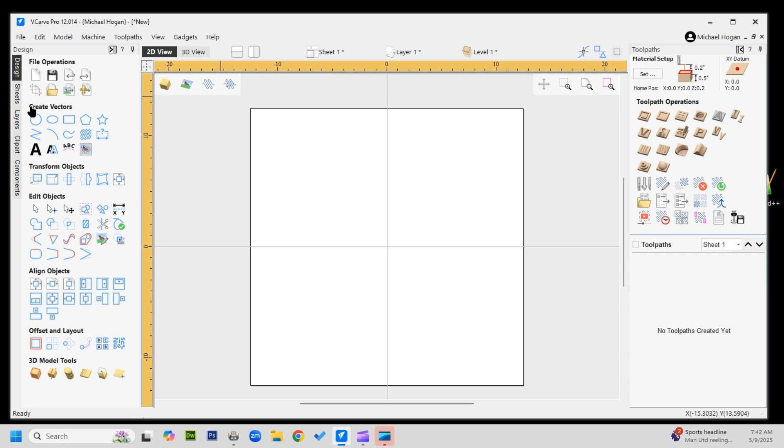And zero position, I like to use the material surface. You can use the machine bed if you prefer that. The gadget prefers the XY datum being in the center, and then we say OK to that, and it sets our project. Now we'll go change this to layers so you can see the layers coming in along with the gadget when the gadget creates the miter fold box layout. Here is our interface.

You have the box width, which is on the x-axis, and this is all set up in my perspective. And then the y is the length for the vertical. And then you have your side heights. I'll show you that in a few minutes, how that's created. And then you got your material thickness. That should be the same as your job setup.

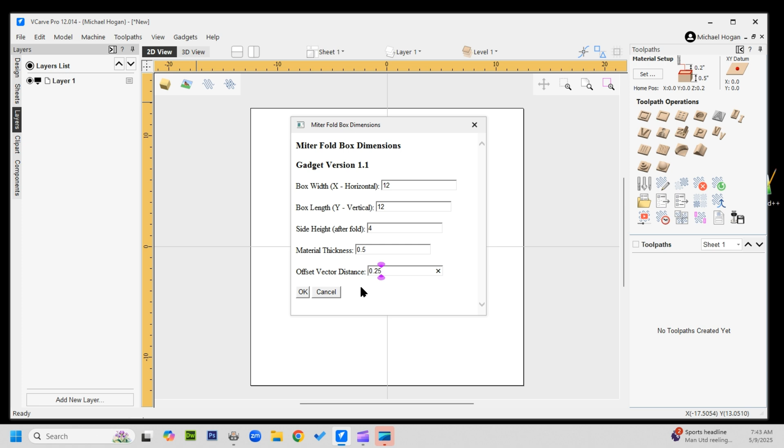And this is the offset vector distance and the gaps between each one of the created vectors. There's a set of 5, sometimes 6, of your offsets; it depends on the thickness of the material. We're going to change this one to 0.25 for the 1/2 inch material thickness. And it repeats everything that you put in and shows the feedback. You got a 12-inch by 12-inch with 4-inch sides.

The 4-inch sides is measured from this center vector of each one of these clusters of vectors. The center vector is your locating vector for the width, length, and the side. The side is combined, measuring from the center here to this outside perimeter boundary cut. That's your 4-inch sides. These 4 corners are scrap. Your sides are 1, 2, 3, 4 sides here.

Then you have your material thickness being repeated, and the offset width of each one of these vectors is 0.25, and there's a maximum of 2 offsets. In fact, I need to remove an S. Anyway, what this is telling you here is that you have 2 offsets from the center vector. The first set of offsets on either side of the center line vector is offset 1 in your layers. And then offset 2 is the one that's the furthest out from the center vector. And then you have your profile cutout vector. I will show you these right now.

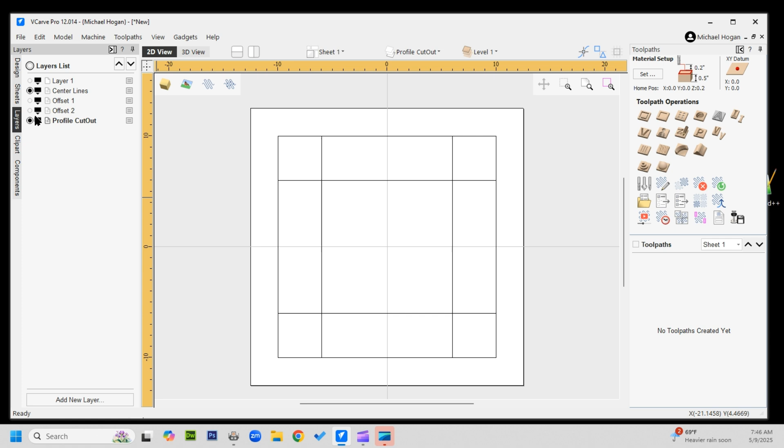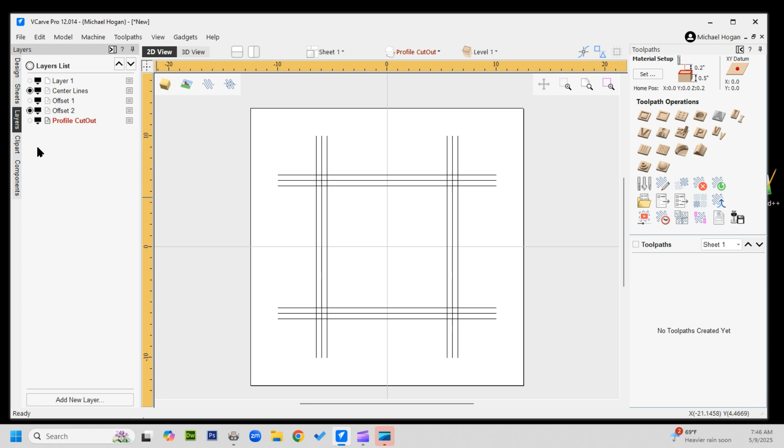Okay, you got your center vector, that's your locating vector that gives the bottom of the box 12 by 12. The sides is measured from here to the outside boundary cut, which I just put up. Now we'll take the boundary cut out and we'll show you the first offset. I'll click it off and on a couple times and you can see it. Now we'll go to the second offset of those vectors. This is what's used to put the V bit on to carve the miter. And I'll show you that after I click all those back on.

And the gadget does not have the tool pathing. There's too many variables involved, and you need to fine tune the tool pathing in order to get a nice smooth miter for each one of these cluster groups of vectors. So the best thing to do is to create your tool paths one at a time, and then you save the tool paths as a template for that particular material thickness.

And another note here, that toolpath template for that particular thickness can be used for any size box that you create for that thickness. So in other words, you don't have to create another set of tool paths for a different size box. If the material thickness is a 1/2 inch, you continue to use that toolpath template. So let's bring in my toolpath template and you'll see what I'm talking about.

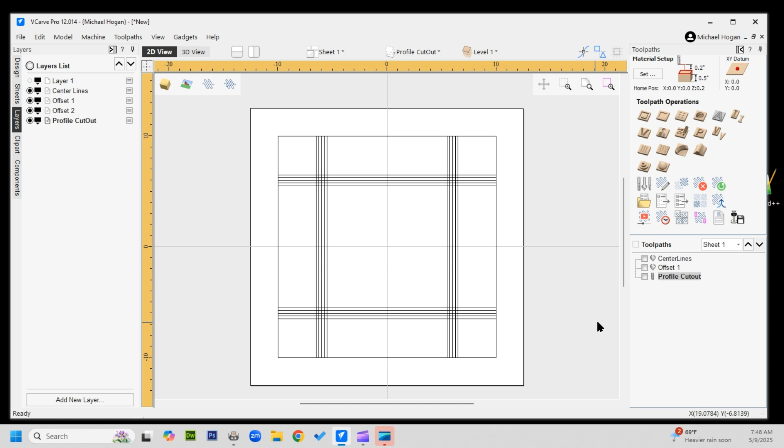I identified it as a 1/2 inch with a 0.25 offset. We'll go ahead and load that. And then the next thing you want to do after you've loaded it, you go calculate it. Now we'll play the preview. And of course, I'm noticing that it's only using one offset. It didn't need the second offset. When I created it, that's what I found out, that I didn't need my second offset.

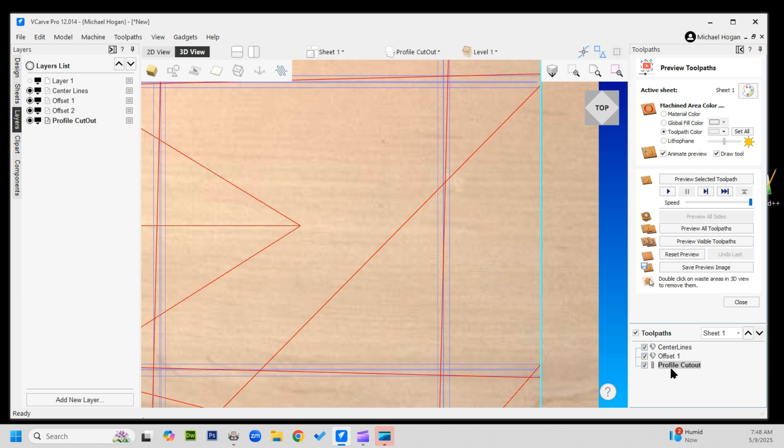So I only created the two tool paths. Well, actually, it's three. One is for the center lines, and then the offset from the center line, and then the profile cutout. Let's play that and you'll see what it does. That's kind of fast.

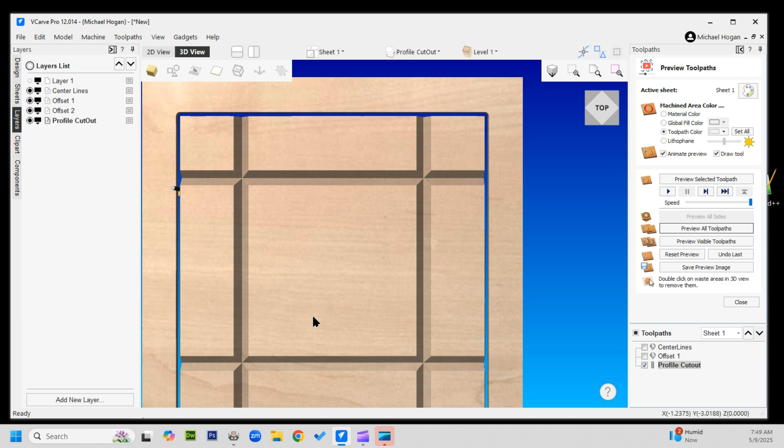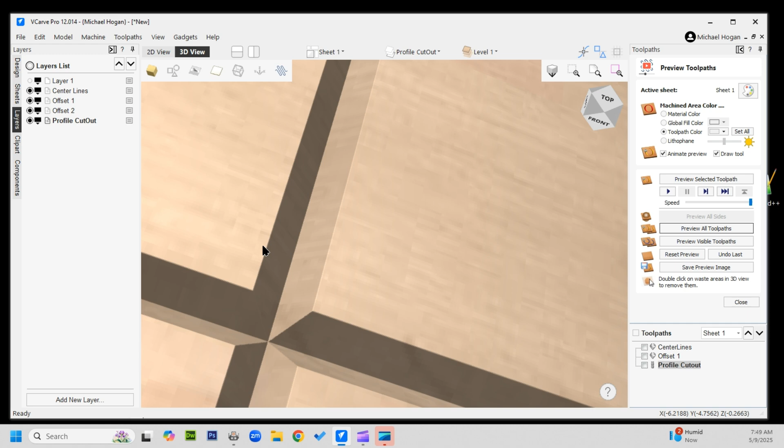I got too many passes on that, but that's okay. That can be fixed. So there you see the miter fold box. These four corners are scrap. You got your four sides and you got your bottom. And the miters are nice and clean. There you have it, folks.

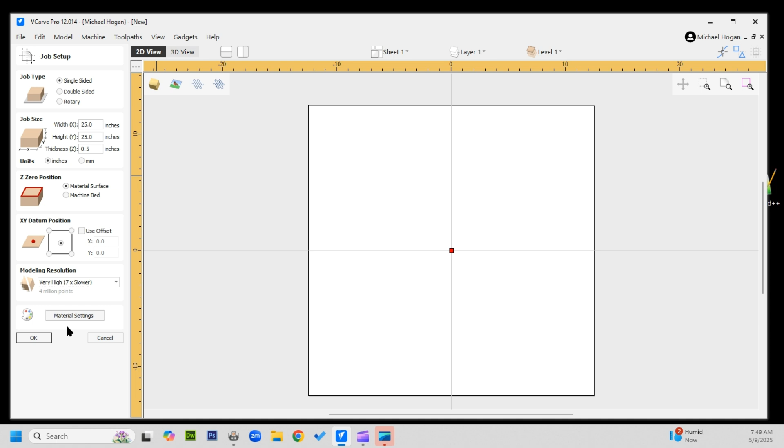A miter. In fact, let's do it again, only I'm going to change this box size so that you can see it's an uneven box. So let's go close everything here, recreate from the start, project all the same, and then we go get the gadget,

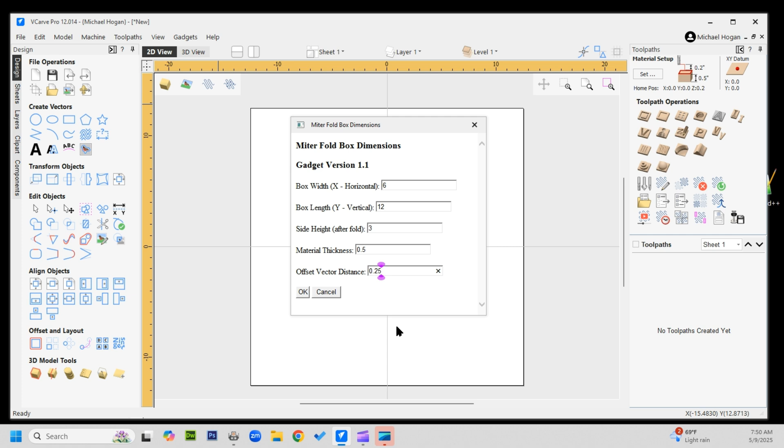and I'm going to make it a 6-inch width on the x-axis, make the narrow or the long end on the y-axis. And the miter fold you see here, this is after the fold, it's 4 inches. 6 by 12, let's change it to 3 inches, and then you can see that it does actually create the vectors accordingly.

And there's our report showing everything, and it's showing two offsets, which we may not have to use those two offsets, but we're ½ inch thickness. So we'll see when we bring in the toolpath template. And there you see all the layers that were created, your default layer along with the others. And there it's created the box in an unequal size. And it's got 3-inch sides instead of a 4-inch side. 6 by 12 by 3.

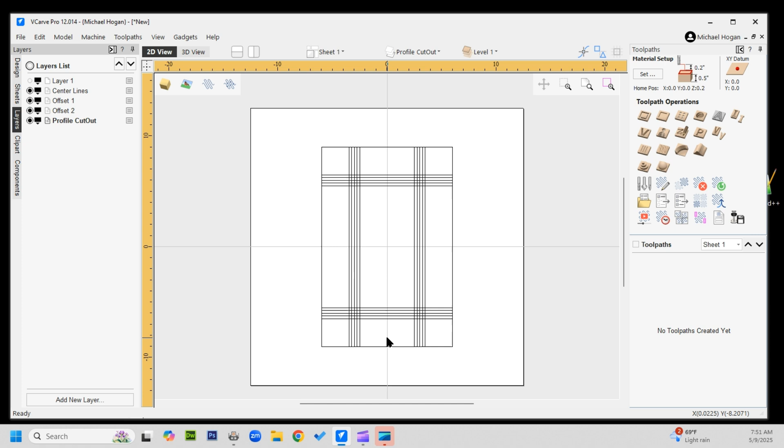And we can verify that by going to the design and clicking on here. And we measure from the center outward 3 inches, which shows right here 3 inches. And then we go the other direction, it says 3 inches also. And then we can measure, we close that and do it again.

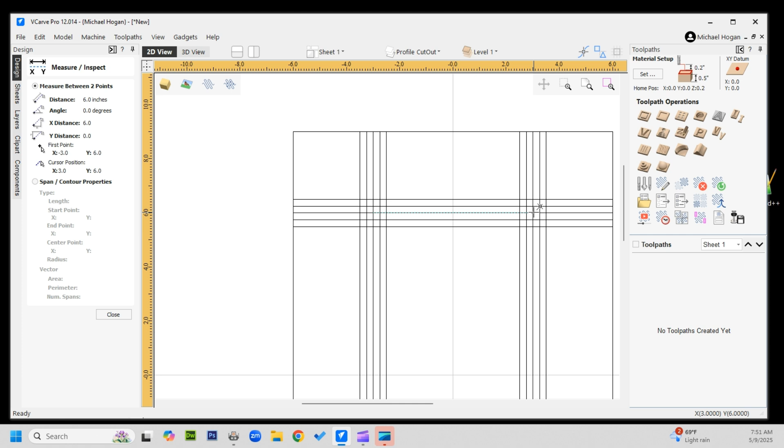And we'll measure from, well, actually, I could have gone from here to here. And you notice it says 6 inches wide. And we go the other direction to the center. It's 12 inches long. So the box is created properly. Now what we'll do is close this.

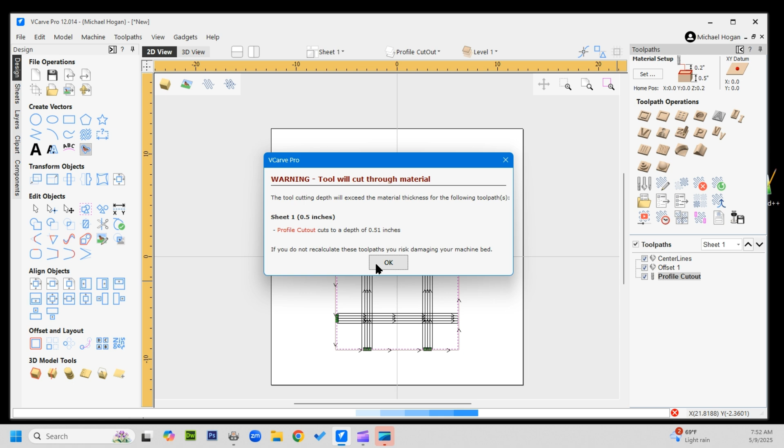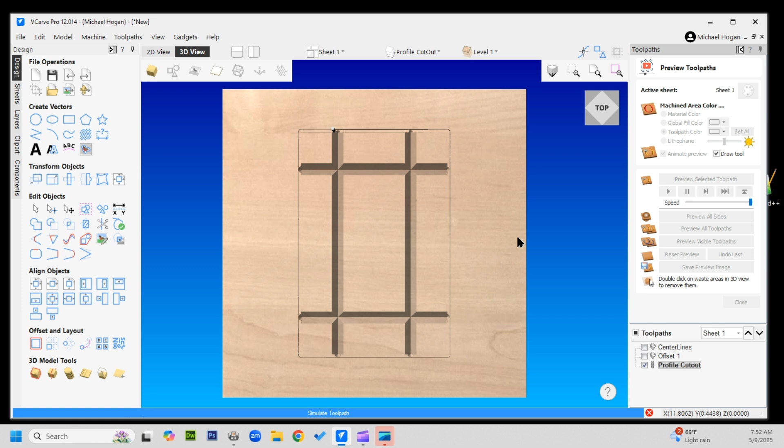We'll bring in the toolpath template, which is a 1/2-inch tool template. And then we'll calculate. And now we'll preview that and see what we have. It looks like the miters are nice and smooth, and you only needed the one offset. So bravo, it worked fine.

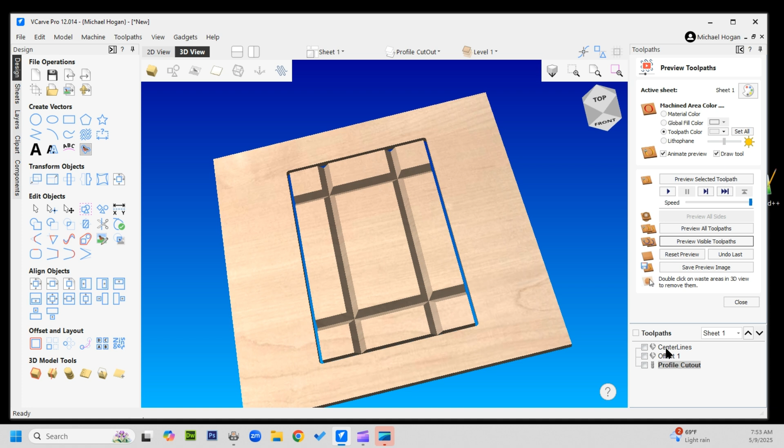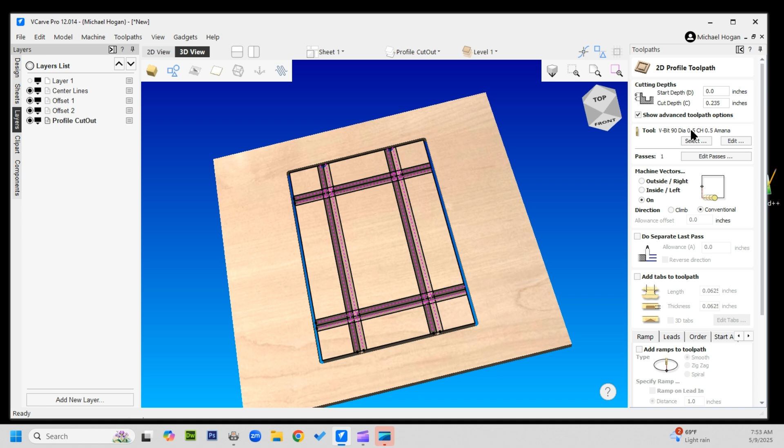The Gadget creates a few more offsets, and the reason for that is because the tooling involved does play a factor in the layout of the miter. Right here, I'm using a 1/2-inch cutting height. If you use a smaller cutting height, you're going to have to maybe use one of those, more of those offsets. In this particular case, I only needed to use the one after the center line was cut.

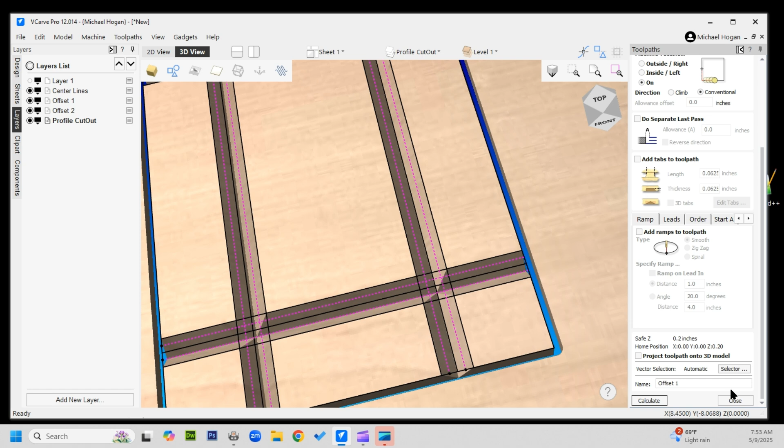It just goes up, cuts the center line, moves out a bit, and then the depth doesn't go down nearly as far. In fact, let me close this and we can take a look at the depth. See, the depth there is about half of the thickness. And one other thing I want to mention that I did with this also is the miter fold. Hello. Okay, won't get rid of my material till I get that back. Now I can get rid of the outside.

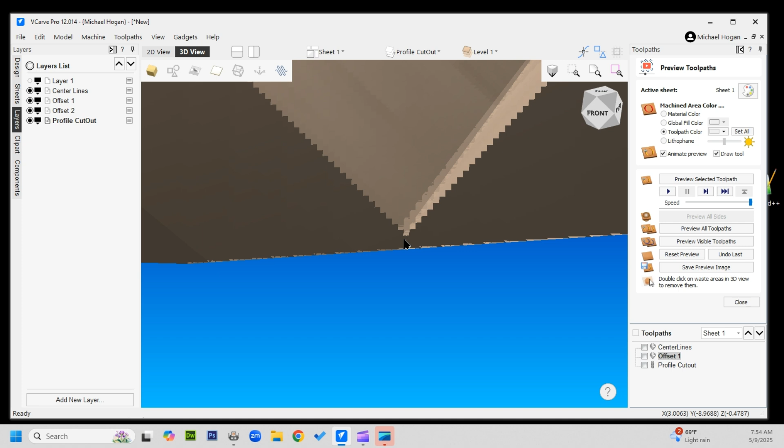Okay, if you notice here at the bottom of the miter, that is 15 thousandths. That's for the fold so that you don't see a cut on the corners, especially when we use MDF board. When you use an MDF material board, that thin layer that holds the board all together will fold around like a little contour rather than having a cut through here.

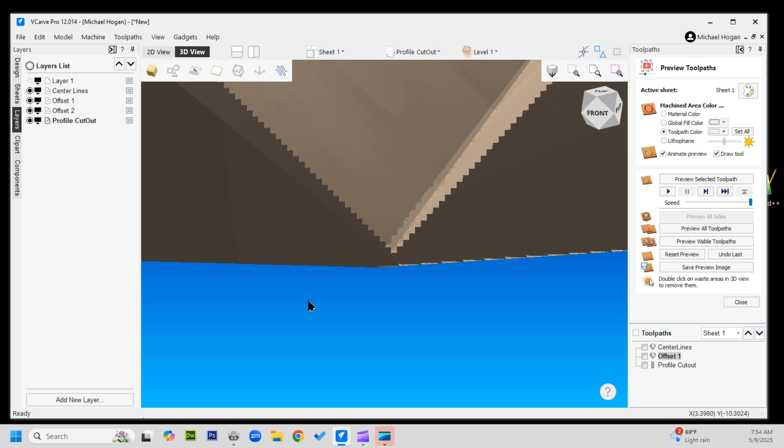Now, if you do cut through, be sure to use tabs on your outside cutout because the parts will be all cut apart from each other. And if you're using the four corners for clamping, your sides for the box will not be held. So,

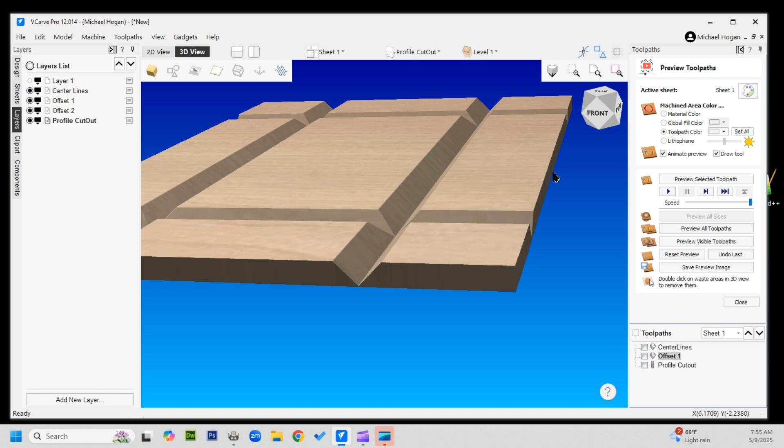if you prefer to try to keep things all together, you can use tape on the back side of your material board. And it may cut through the tape sometimes, but it's a safety measure that you can add the tape and hope that it doesn't move. But the best thing to do is to use tabs on the cutout around. I don't have tabs set on this right now, but that is one of the best things to do.

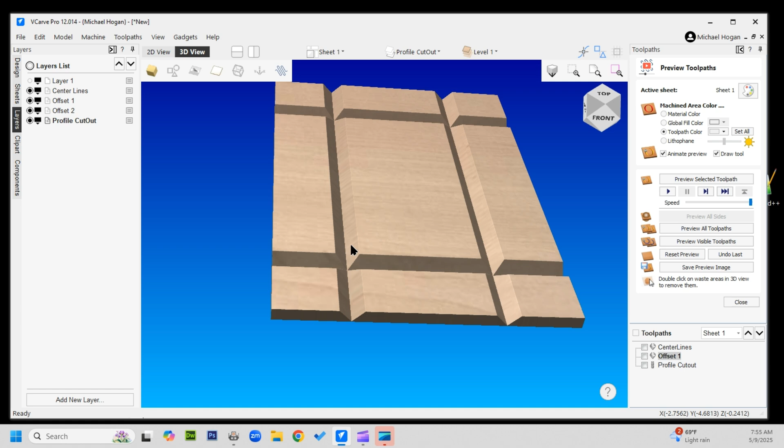So there you've seen how the gadget functions and how it creates the box in different sizes. And in the next video, I will show how to create the miters, because when you put in the various different measurements, the width versus the depth, it may have staggered contour on the inside of here.

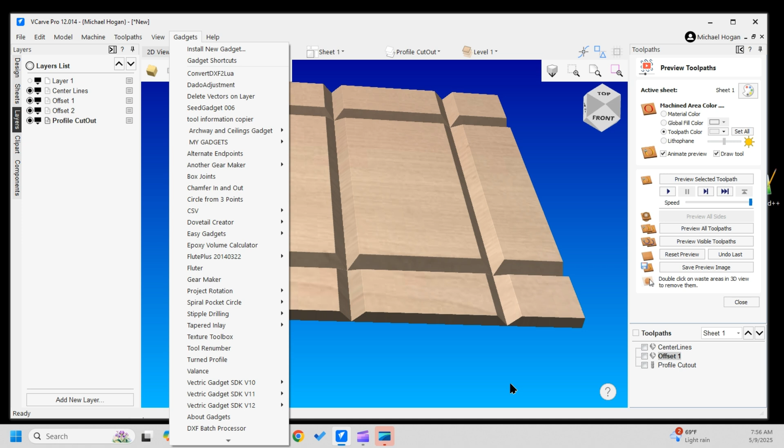In fact, I'll tell you what I'll do real quick. What I'll do is I'll change this to 200, and we'll calculate that, and then we'll reset everything, and we'll preview all toolpaths, and you'll see what I'm talking about.

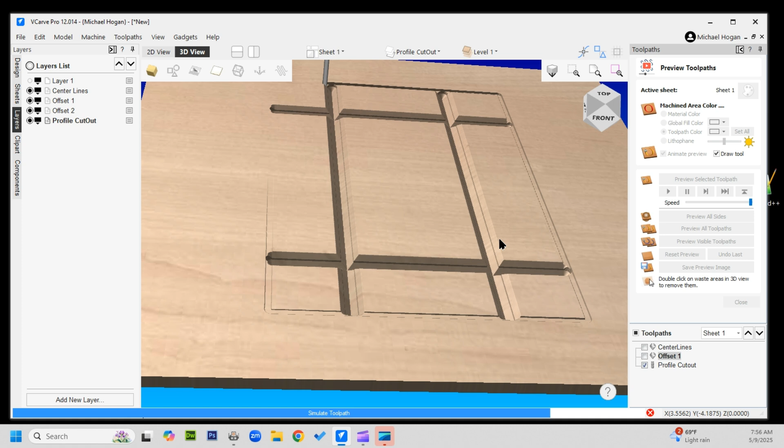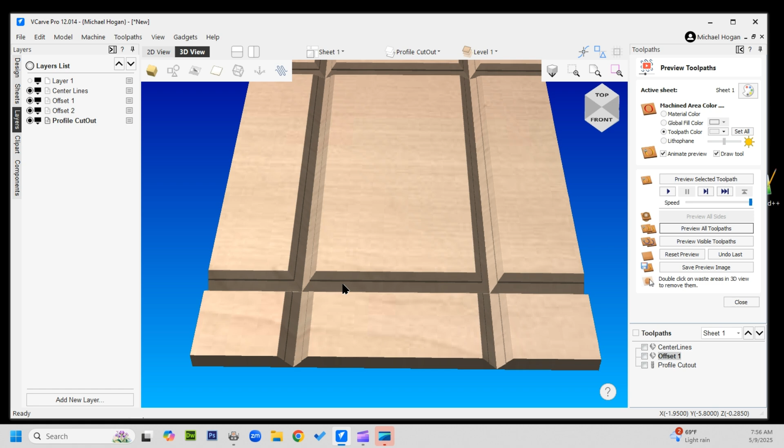You will have to fine tune the miter based on all the different variables, your tooling involved, whether the cutting height is half inch or 3/8 of an inch. See the little line on the inside? If I go tight, you can see that it's staggered. In other words, what's happened is you don't have enough depth here. It staggers. You can see that right here on the edge, the end grain. So you'll have to fine tune the miter.

Once you have a tooling involved, like whether you decide to use the 3/8 or a half inch, all you got to do is keep changing the depths. And you also have to watch the offsets. The offsets really don't play a whole lot in it, but it can, because in this particular instance, it showed I only needed to use the one offset instead of two. But the gadget automatically creates two. You can go ahead and delete this if you don't need it.